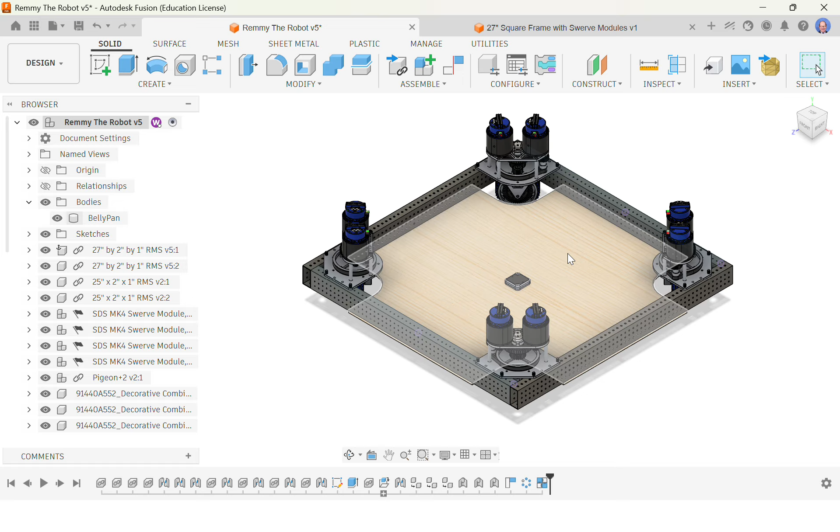So I'll just change to a design without the belly pan, and then we'll go through how we're going to create this. So what we're going to do is sketch on the bottom of this channel line, or this RHS that's going around the outside here.

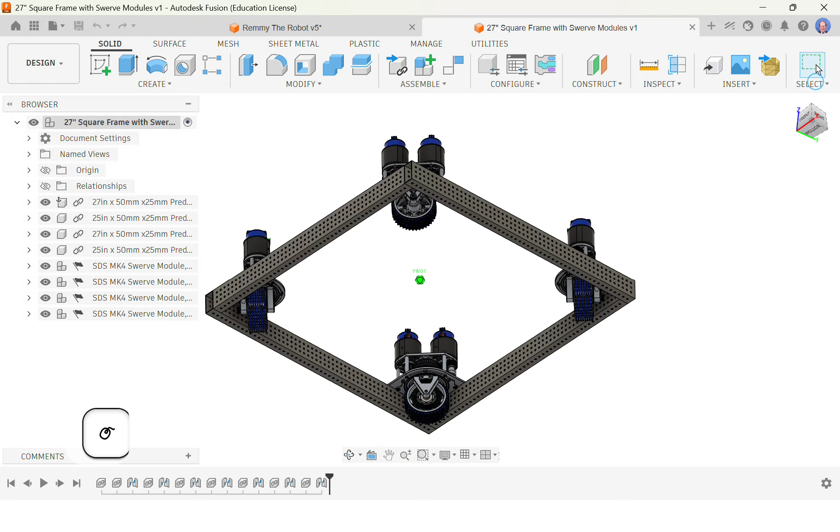I'm going to pull my view cube around here nice and slowly until I'm looking on the bottom face. Then I'll scroll my scroll wheel to zoom out a little bit. Now add sketch up here with the create sketch icon. If we hold the mouse still, it says select a plane or a face. I want to sketch on any one of these four surfaces, it doesn't matter which one I choose.

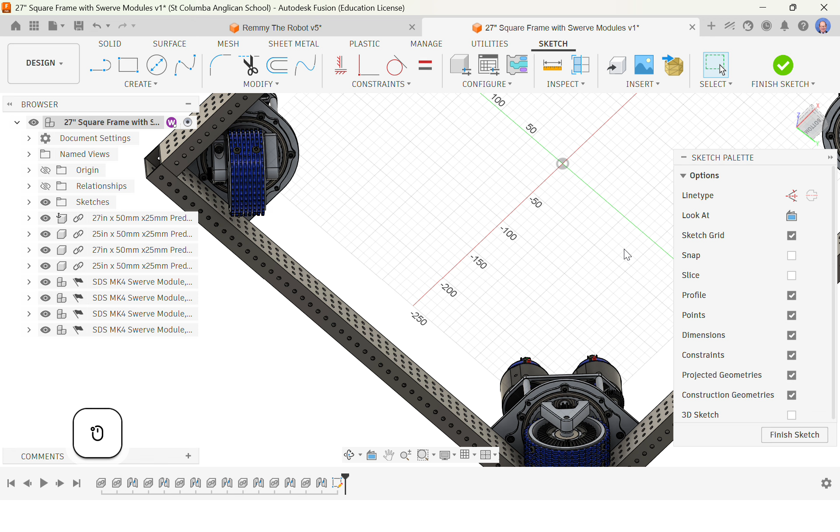I'll just choose this one over here. You can see that it goes grey when I move the mouse over it. Click on that and your view will spin to look at that.

Now what I need to do is project the geometry of all of these holes and the geometry of the swerve modules onto that sketch. So project, it's got a shortcut key of P, so I can just hit P on the keyboard.

I need to make sure the selection filter is on this one here, specified entities, and then I just zoom in on this face, and anywhere not on an individual item or the edge, but just anywhere on a blank area of the face, and you'll see everything goes red.

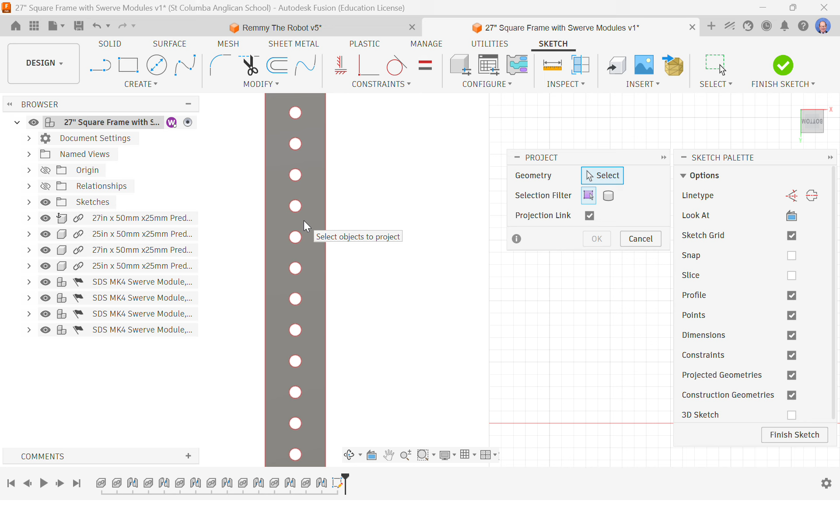So I click that one, that's got one piece of geometry selected. Now zoom out, zoom in over here, click this one, zoom out, zoom in here, zoom out, and then zoom in here. So now I have four entities selected there.

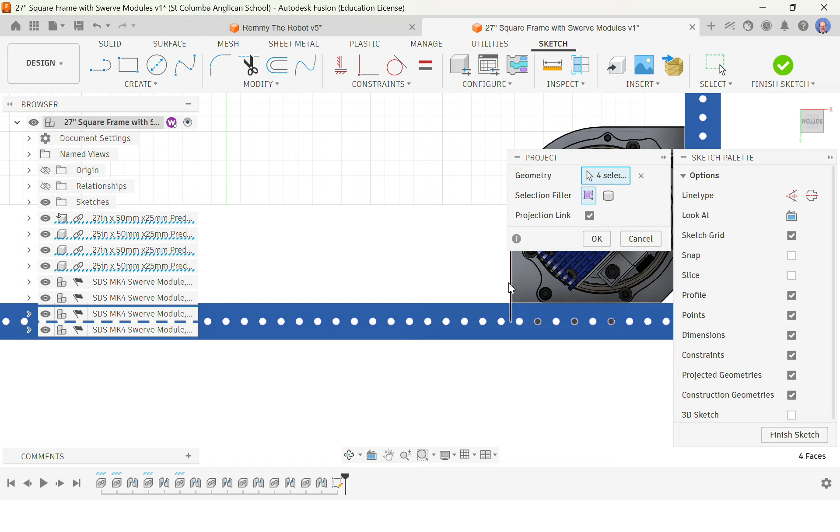The other thing that I want to select is this line around the outside edge of this swerve module. So I can literally just project that whole geometry there, and that's got everything I need. So I'm going to get those four as well.

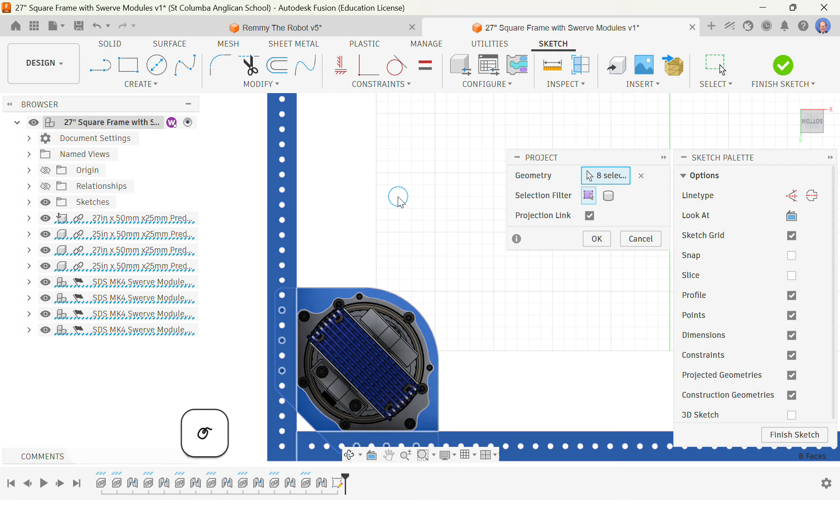So one there, one there, there, and there. Now, the profile that I want to cut out here, I actually need to draw a line that goes straight across here.

Because if I go okay on this finish now, and if I hover over this area here, you can see a profile's being created. And then when I hover over this area here, that profile goes all the way down the end. So I actually want to draw a line across here.

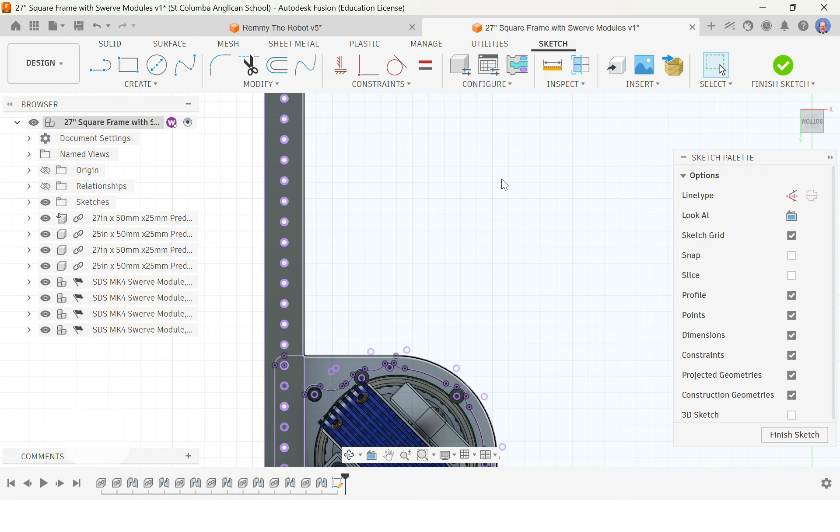So I'm going to do L for line. I'm going to start my line on that end point of the curve. So one click there, and then the next click, I'm just going to come out there until I see that little right angle symbol, and then click on the outside edge.

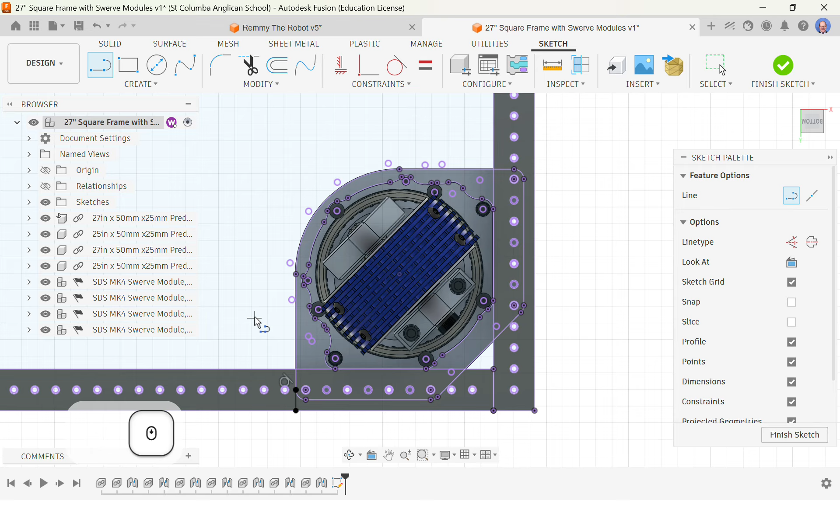I'm going to repeat that process all the way around this drawing as well. Click on the edge of the curve, click on the edge. Now these lines should go black immediately because they're starting on a known point and they're finishing at right angles on a known point.

If for some reason you didn't quite get the end point, which I'll demonstrate here, I'll click here on the point and then I'll click off the end out here. You'll see now that the line continues to want to keep drawing.

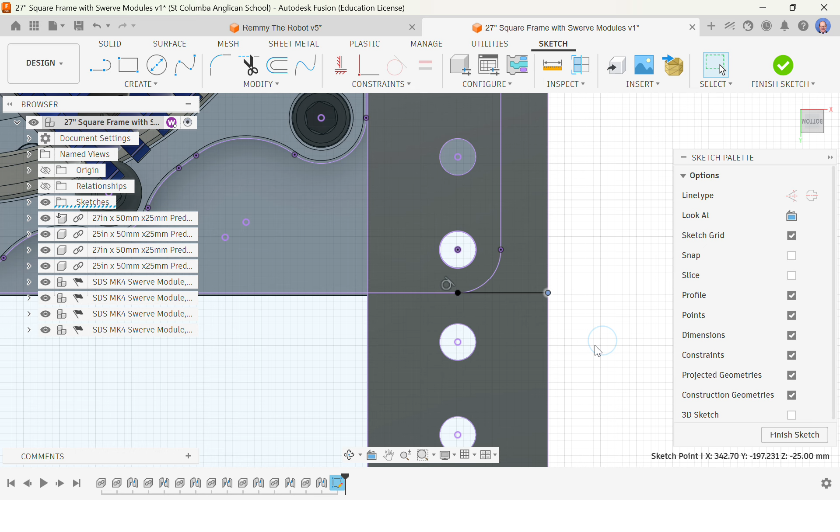I'll press escape and you can see this is white. That means it's not actually connected to anything. I can simply just drag that and drop that onto the edge and now it goes black.

So if you get white lines here, or unconstrained lines, that's because you haven't clicked up here, or you've clicked and it's at an unknown angle. But by going here with that little right angle symbol, that draws the line at right angles, which makes it fully constrained.

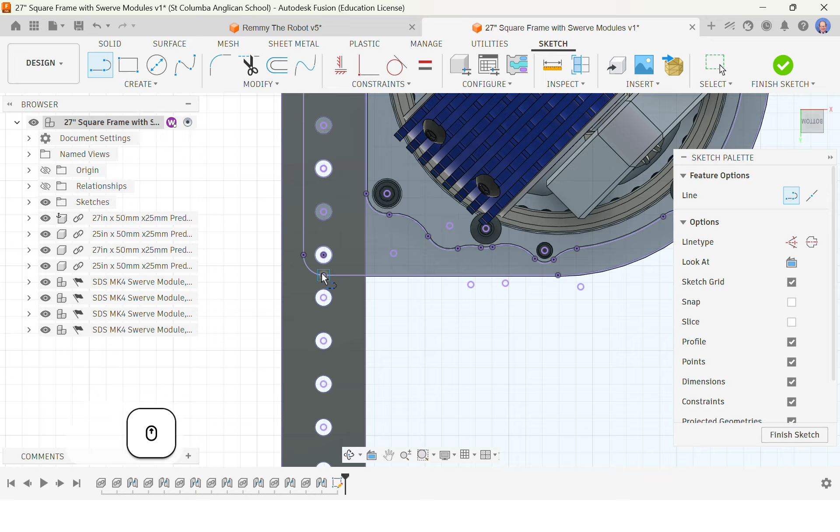Click here, one click here, next click there. And that's got my 8 lines clicked there. So now I can finish that sketch.

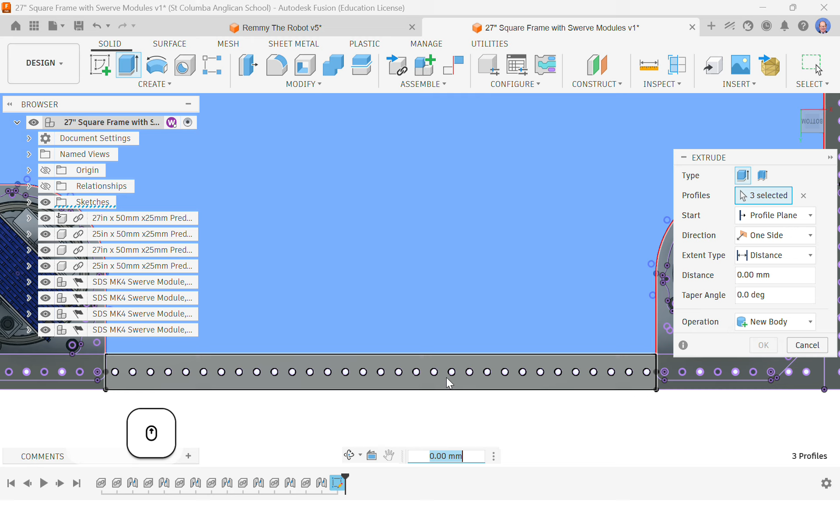And now I have the ability to extrude the shape. So if I do an E for extrude now, I can select this center profile and I can also zoom in here and select these edge profiles here. So on that one there, and this one over here.

Before we do our extrude, it's always a good idea to pull it into 3D view so we can see which way we're going. And I want to extrude this down to make the belly pan go down.

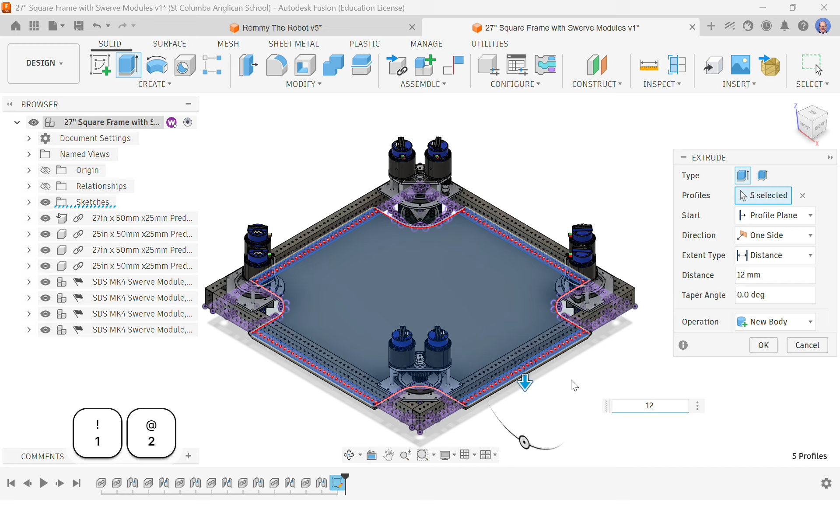The timber thickness I'm going to use for this is 12 mil, so I'm going to type 12 here to create this new body that creates the belly pan down here. And now that has created the belly pan.

If this belly pan is going to be made out of timber, we can actually give it an appearance if we want. So I'm going to click A for appearances, and then I'm going to scroll down here in my list.

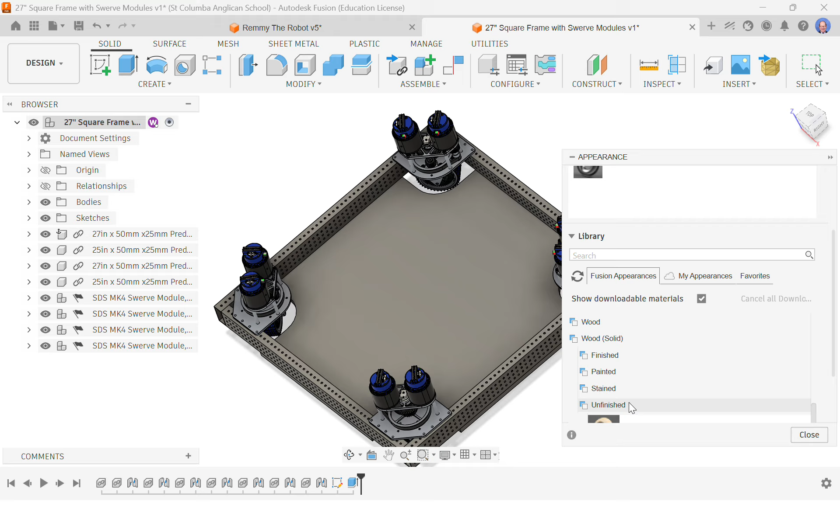If you go to the bottom of this list, you'll get to wood and then wood solid. And then you go down further to unfinished. And then you'll have to download it the first time you go into it, to 3D Pine.

So you click on the arrow here to download it, and then you can drag and drop that on there. And that'll just give that a wooden finish, because it will be a wooden part in our robot.

And then I can click close on that to make that go away, and now our robot has a belly pan. So it has a new body over here. I'm going to click on this body and rename it belly pan.

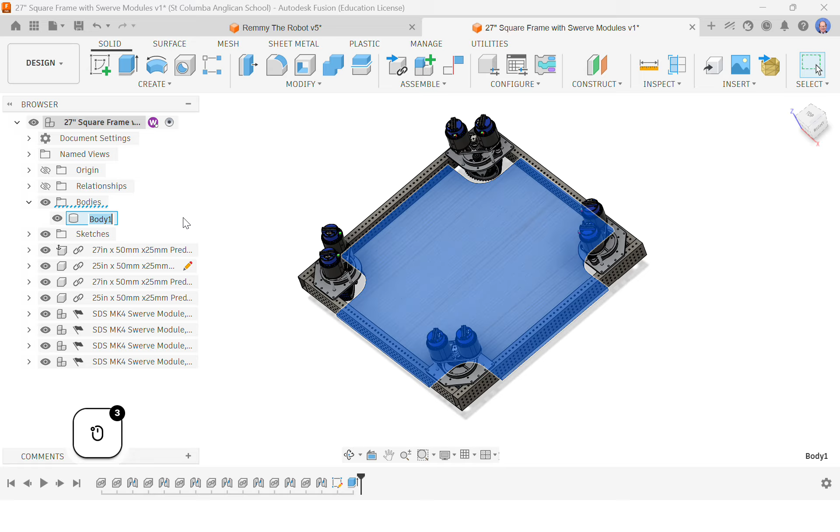You'll notice these are all components, and this is a body inside our top design. So ultimately, we need to make this into a component. So if I right click on that body and say create components from body, the bodies disappear, and then we get a new component down here.

The only problem with it being a component is now it is free to move. If I was to grab this, I can drag it away. I'm going to Control Z that back into place to put it back there, and I need to rigid group that to something that's already fixed.

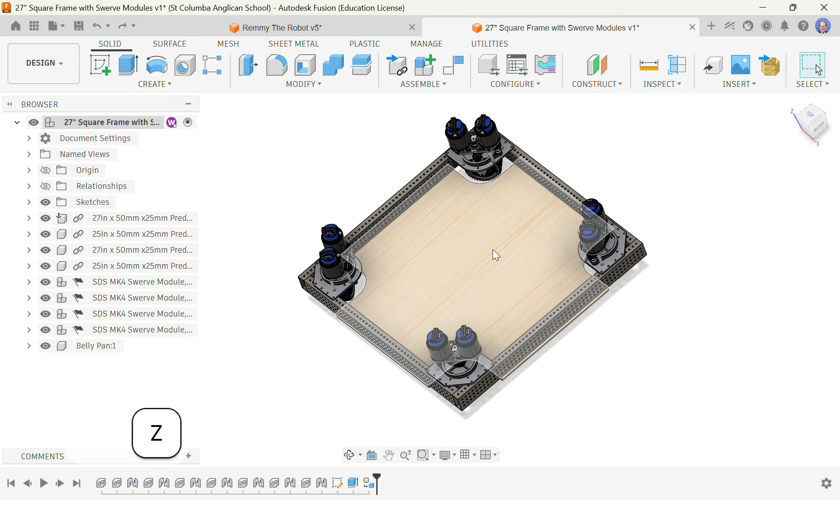So I'm going to assemble a rigid group, and I'm going to choose the belly pan, and then I'm going to choose some other part of the robot, click OK, and now that's tied down into that model. And that's how you create the belly pan.